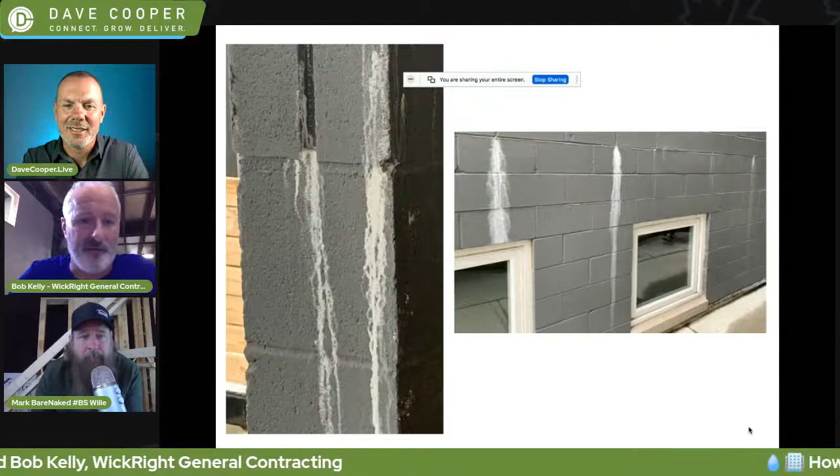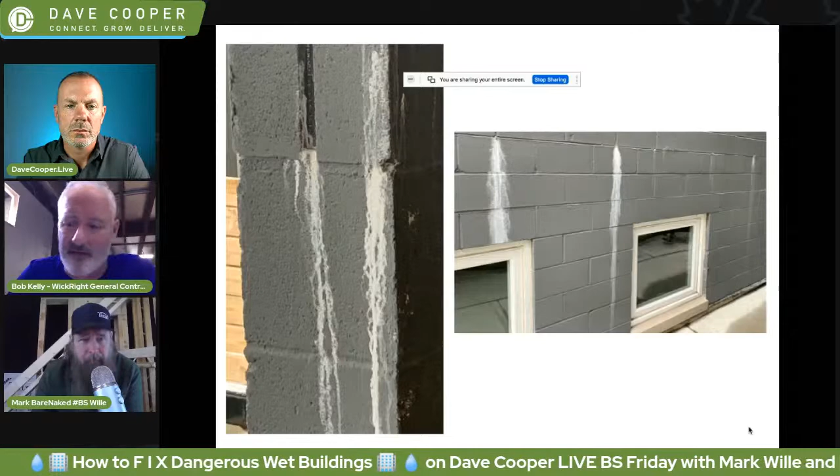Another client has water flowing through. In this particular case, they happen to have closed cell foam on the interior. We're not here to have opinions about materials - we're just talking about how the combination of materials has effects on these structures.

Here's a hospital where I was driving past - every parapet wall is soaking wet. Yet another split face block, 3-unit building.

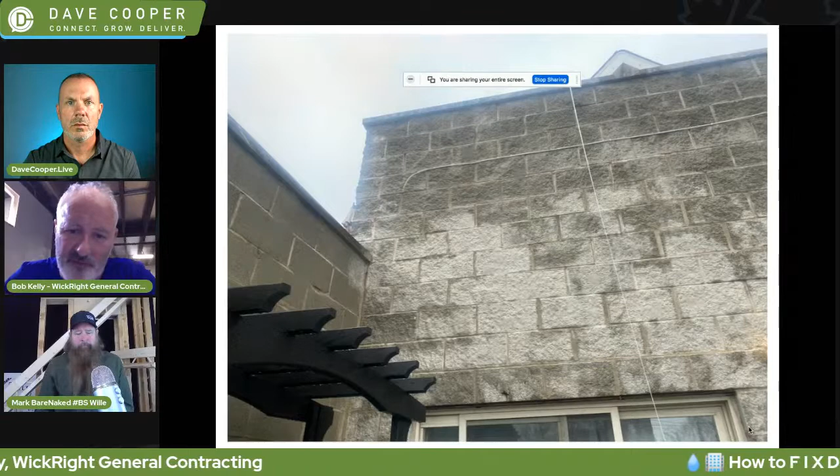Okay, so I'm glad you brought up the older foundation versus the newer material. To Mark's point, the efflorescence is because water is flowing through the structure, and as it dries, it's bringing materials out on the surface, oftentimes through the more porous of the two materials on the wall. What's interesting here is that there's no efflorescence on the mortar joints - only efflorescence on the block. That's an important point.

Portland cement is something everybody takes for granted as basic mortar. Thomas Edison enabled Portland cement to be mass produced back in the 1900s, and it became an additive to pure lime mortars to help them set up quicker. That's one reason harder substrates don't breathe. They take in moisture but don't let it out, whereas older lime mortars were the breathing mechanism. That's why you wouldn't see efflorescence on brick very often, except underground.

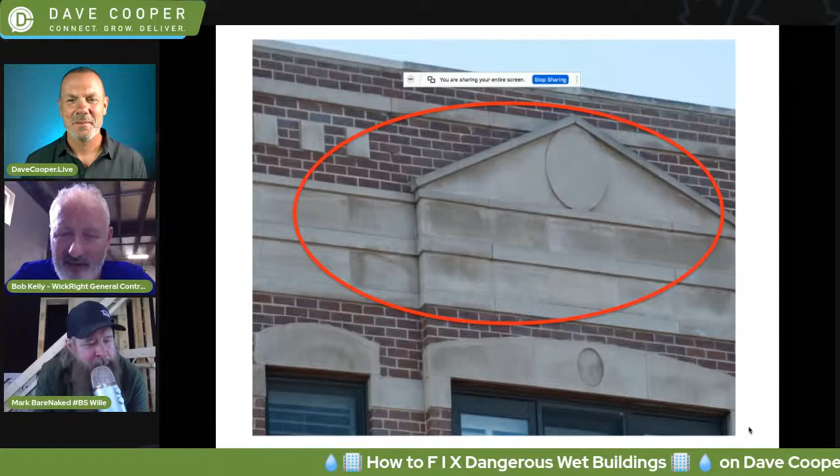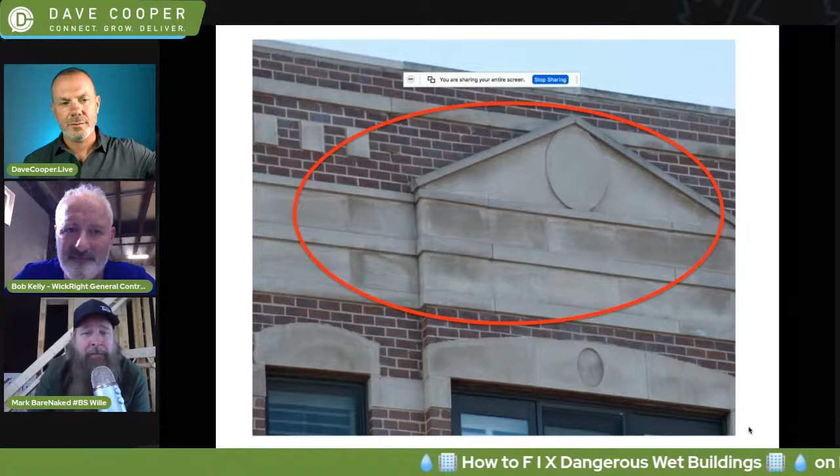All of that is important, because the beginning of this presentation is meant to be redundant with the mass amount of sites you're used to seeing as you drive, walk, and visit these communities, so you become aware that it's not supposed to be like that. These are signs telling us these issues have to be addressed, and we should realize how monumental this problem is.

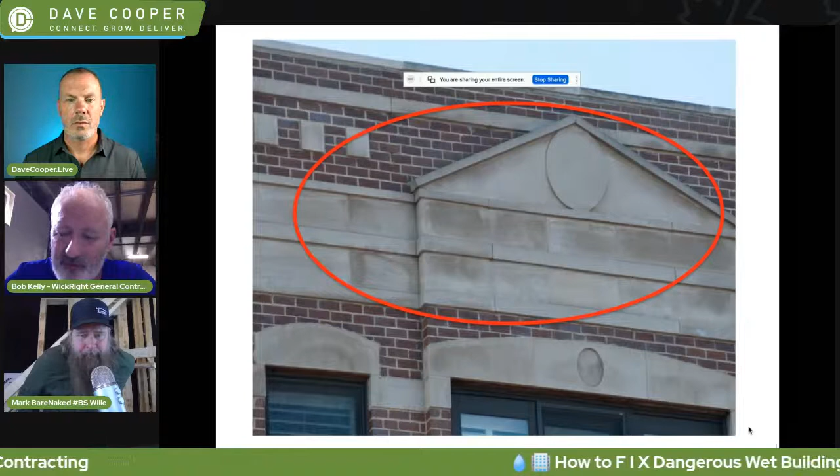The problem is it's an industry-wide issue, it's a cultural issue. Traditions are passed down from father to son, through the apprenticeship program, and when we teach the same things over and over without anyone questioning it, you get into a whole world of hurt.

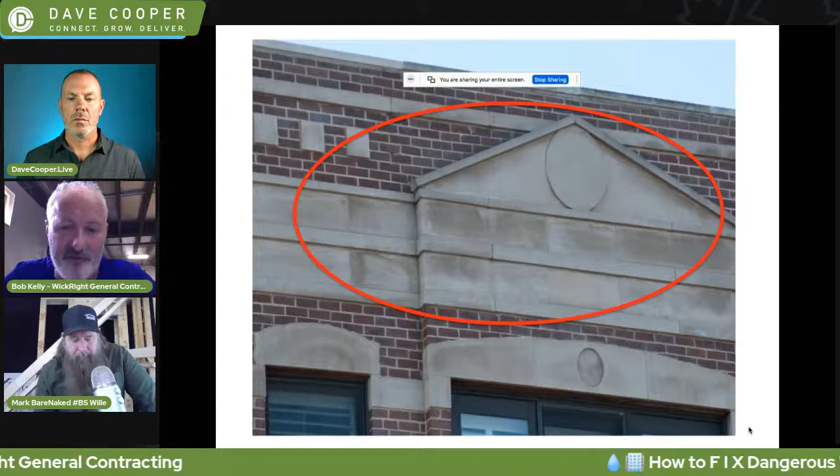Now basically every masonry structure ever constructed is porous, and the analysis is how do we get these things to dry out, and why didn't they show problems before? I'll continue on with this.

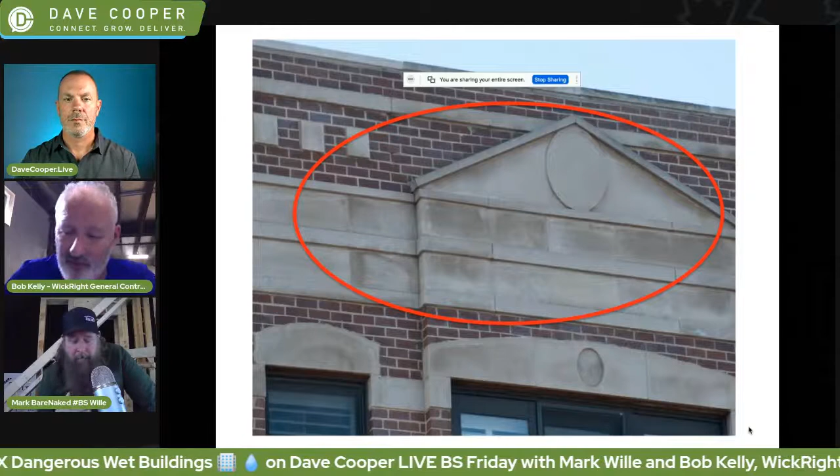So we have a little video to show you here. On one of my early projects, I looked down through a capstone and saw some water under, in the wall. I was able to measure down and identify where this was coming from. Let me start this video now.

But I've seen this more than once, it's not just here. Oh my gosh. Wow, all that was trapped in there. It was all trapped in there, right.

So the tradition of not using flashings is present in old structures, okay? So when you have a culture of people trained in old structures come over and work with harder, more contemporary materials, this is what happens.

So like the gravity of this, right? He knows there's something back there, but until that hole's there, this water never had a place to go, and it's pouring out like drinking fountains can't keep up with it. I wish I had that kind of pressure at some of the motorhome parks I've been staying in.

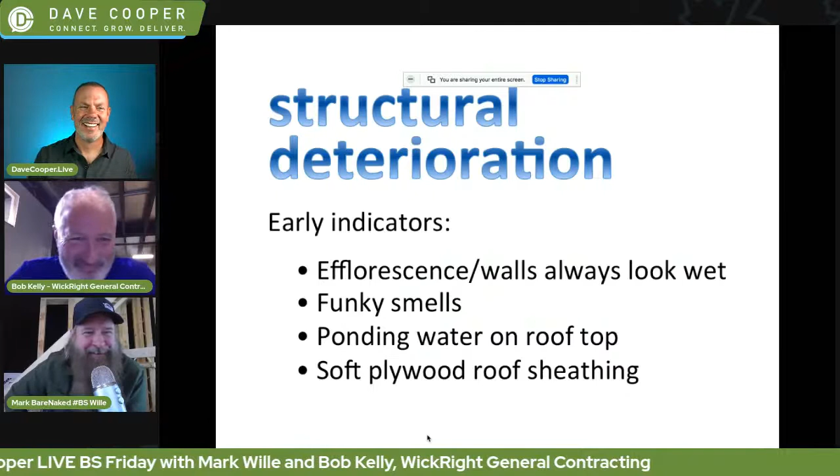Just drive by a masonry building and start drilling holes, if you can. Yeah, no problem, that's a 20-volt hammer drill. Thanks for that video.

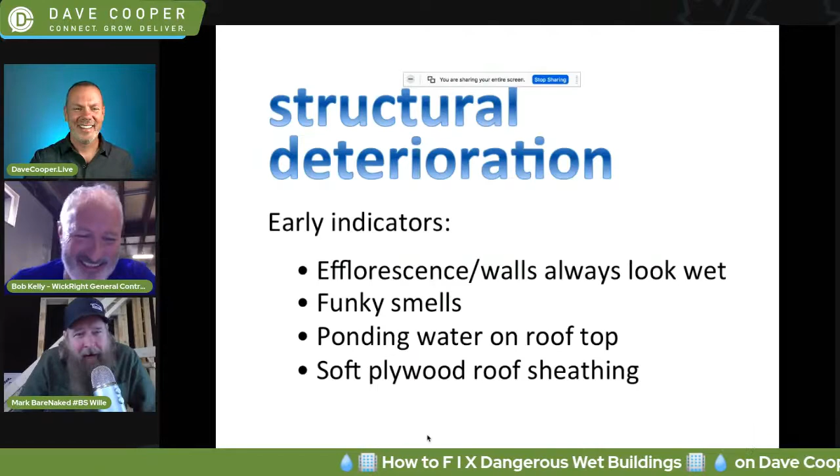I want everyone to be scared. That's not a mock, that's not created. There wasn't a random hose in the wall, right? That is water stuck in our wall.

Bob, how many times have you done that same thing where you drill a hole to let the water out? Every time I look at a wet wall, I almost need to keep a drill in my car just so I can help people out, go up and drill a hole through the mortar to let the water run out. That's what I'm feeling. It's interesting, people have asked me that question, but it's so random.

The hard mortars, okay, Portland cement is a hard mortar - Type O, N, S, M, you name it. The Portlands make things set up hard, whereas the softer mortars don't. So when I've seen other leaks like this, it's when we had to go cover a parapet because it was raining and water would just cascade into somebody's home.

And then when we fastened the tarps to the block, that's when we saw water weeping out. Got it. And that's probably happened a dozen times.

Interesting. And tell me, what does the tarp do? Can you explain that so people listening can understand? So when we're in an emergency repair, we cover the parapet wall so that the water stops flowing through the limestone and down into the walls. Got it, and that allows you to dry it out and repair it. That allows us to at least give them some temporary relief until we get a chance to get into a roofing project, and that's something I'm going to share with you in a little bit.

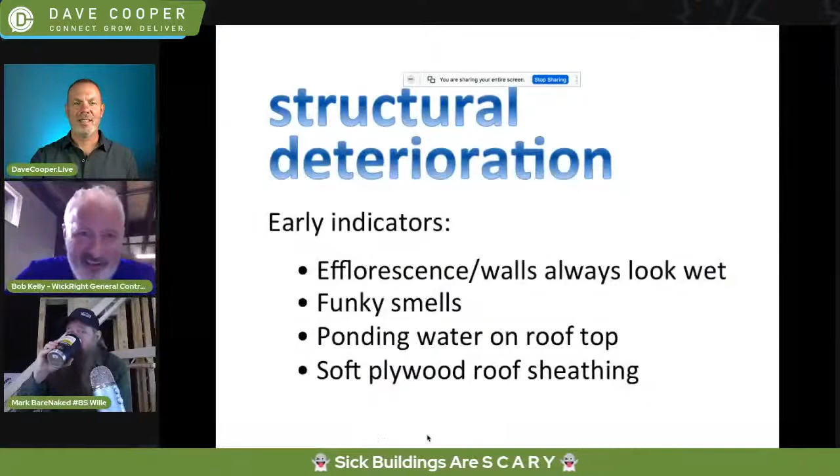So of course, all the water that we see in these structures is leading towards structural deterioration. So early indicators we find are efflorescence and then wet walls. Now, what's interesting about looking at a building, when you see cinder block and you see each layer seems to be wet a few inches, that's an indication that there's water at every mortar joint.

We get into other condominiums where the smells are pretty rough. It's very musty. Ponding water on rooftops can indicate that there's some rotten plywood or sagging, if trusses are starting to fail, of course, the soft plywood on the roof sheathing.

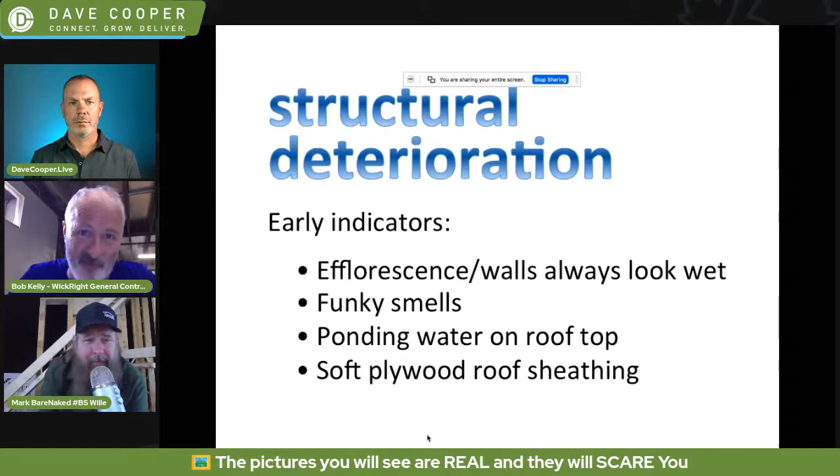The first thing I do when I get to a project is I walk the perimeter carefully. One time I was a little careless and it had a very low parapet and I didn't realize I was almost walking into a hole. There was no plywood at all. I almost fell off the building. So if anybody's doing these inspections, just be careful.

Holy crap. I told you, people, we were going to be scared. This is real. Yeah, it is real, but I have a question.

Let's understand that, because I think everybody's seen standing water on roofs. Well, what we're talking about is how the roof system is actually decaying in place and crushing under its own weight. So that's what we're looking at here, right? The ends of the trusses are rotting from the interior of the parapet wall, and at some point you will find that these trusses will shear off in place.

That word 'shear off in place' ought to scare people. Another telltale sign. So Dave, this is the review of the outside, and digging into it. I think there's a photograph coming up. Is when you're walking the interior and looking around the exterior wall, but all of a sudden there's a huge gap between your flooring and your baseboard.

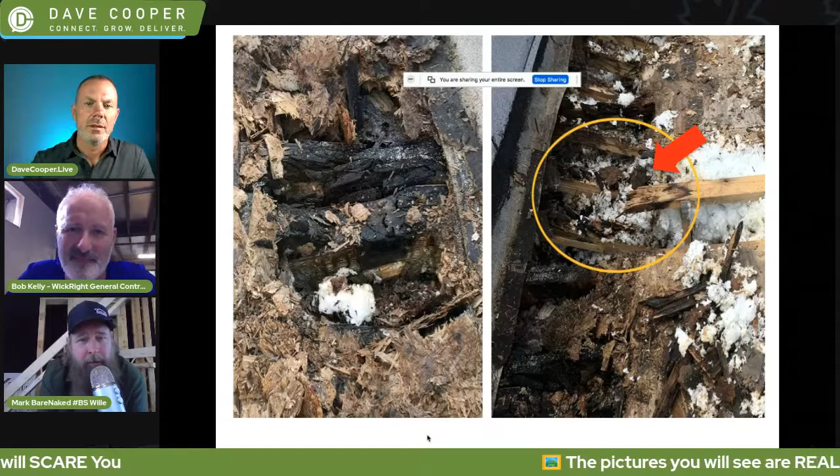Sometimes it just means you had a crappy carpenter, but sometimes it means that your floor is dropping. Wow, your floor. I don't have that picture here. I'm sorry, Mark, but that's okay. These are better. Yeah, when I saw that particular situation that you've mentioned, we were talking with the contractor, the homeowners, and my engineer, and I said we got to go. So I took the meeting outside.

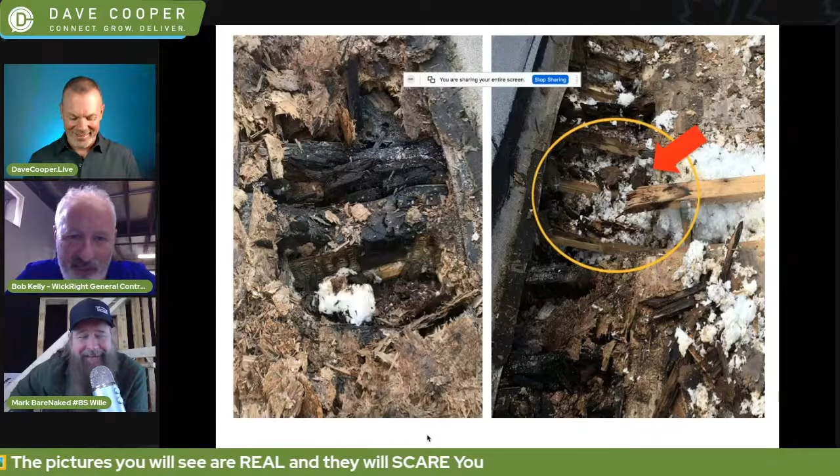So the next few pictures are going to be of typical top hanging and bottom bearing trusses. These are top hanging, see the Portland cement. See the code, this is what's crazy about this work. Code mandates grouting of trusses in place. In practice, I've never seen a truss that was covered on the ends, and all it would take is a Ziploc baggie to keep the water from going up through the end grain of the wood. And the Portland cement tends to corrode all the galvanized plates, so that's also something to take note of.

But a Ziploc baggie, or wrapping with an ice and water shield, right? Ice and water shield, creating the barrier. Zip tape, whatever, can create a barrier, right?

So this wasn't as bad, of course, but where the arrow is right there, that's where when we were cleaning things out, we were starting to clear out the grout on the sides of the trusses, which is something we do on every job.

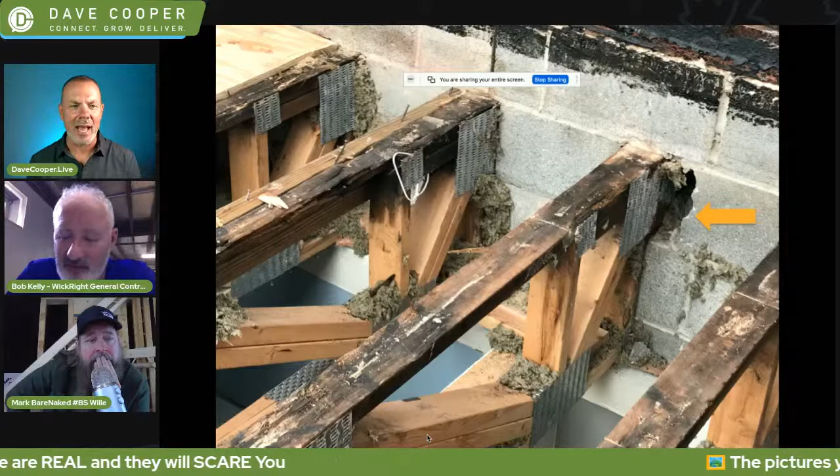That doesn't look like an old structure to me. That's definitely not built back in the early 1900s with the truss floor system there. Maybe you're going to get into this, so maybe I shouldn't ask, but when you have a new structure like this, is the general contractor at fault? Is the architect at fault? How does the liability work? These are not simple, inexpensive fixes, right?

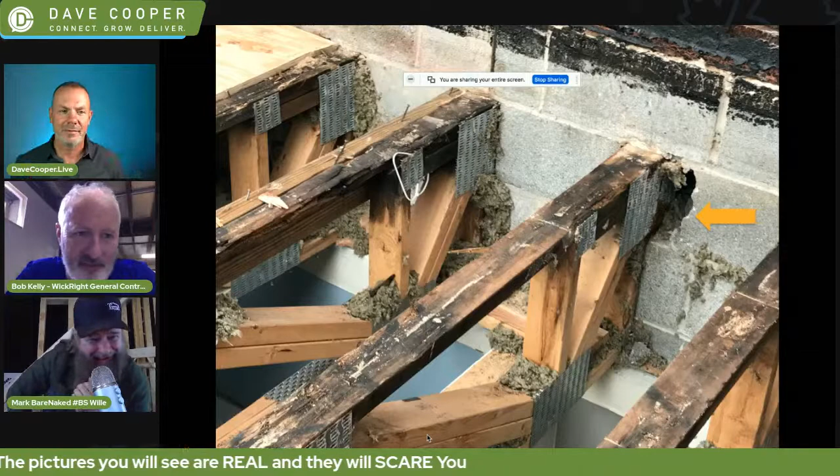That's a great question, and we're gonna pick up on that in a little bit as well. But almost nobody's responsible. All right, I'll let you get into it. Sorry, go ahead. Oh no, please. It's making me nervous. I'm like, oh my gosh.

So, Dave, you should be nervous because you pointed out, hey, this is an EWP, right? This is a new truss. I don't know, what is this building, 12 years old, Bob? I'm guessing. About 13. Okay, so pretty close. 13 years old, and you could see the black and rot in that SPF leg. You can see it, it's black.

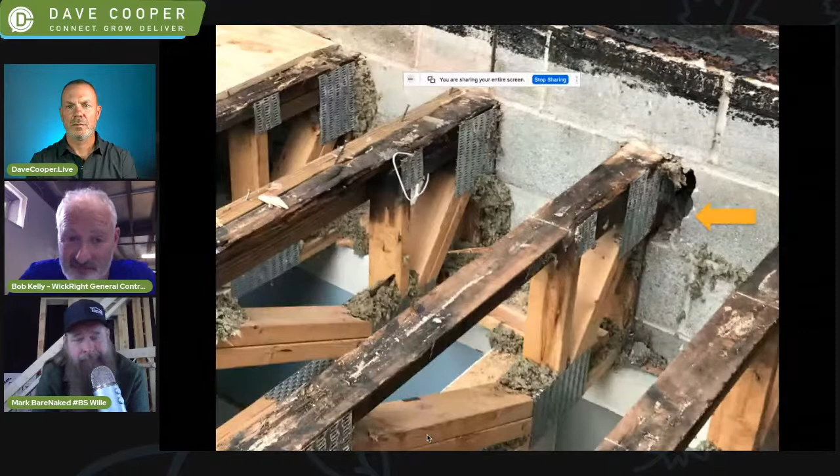Yeah, and this is after it dried out. Wow, let's see here. Okay. My pocket knife always tells the tale.

There's another. This is a parapet on an older building that was rebuilt about 20 years ago. But because they wrapped the roof over the top, they trapped all the moisture that was rising up through the common brick.

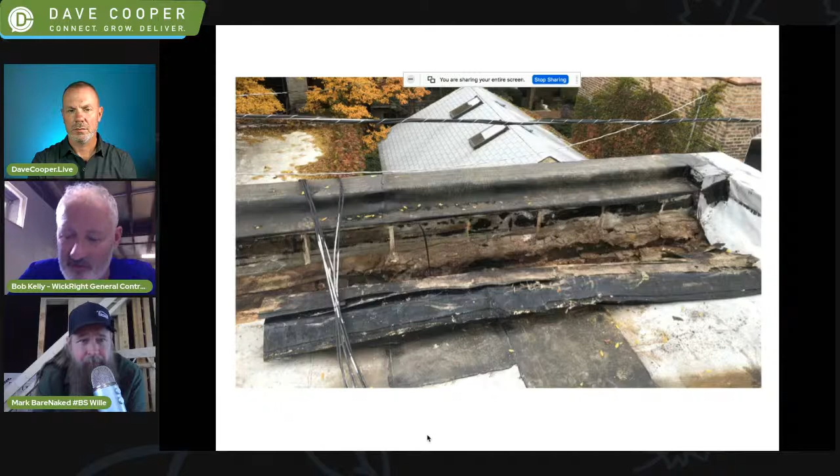So when you say rising up through the common brick, I don't think people understand that. Mark, you did a demonstration once where you stuck the wood in water and you could see how the water wicked up the wood. Are you telling me water wicks up brick the same way it wicks up wood? Oh, it's crazy, so yes. The wood is a carrier because of the capillary action.

You're totally right, Dave. But what you're going to see here is that moisture is just funneling its way up, right? Like literally, if it was ants at a picnic, it'd be a darn parade. Oh yeah. What's interesting is when water goes into masonry, the common thought is that water flows down and out.

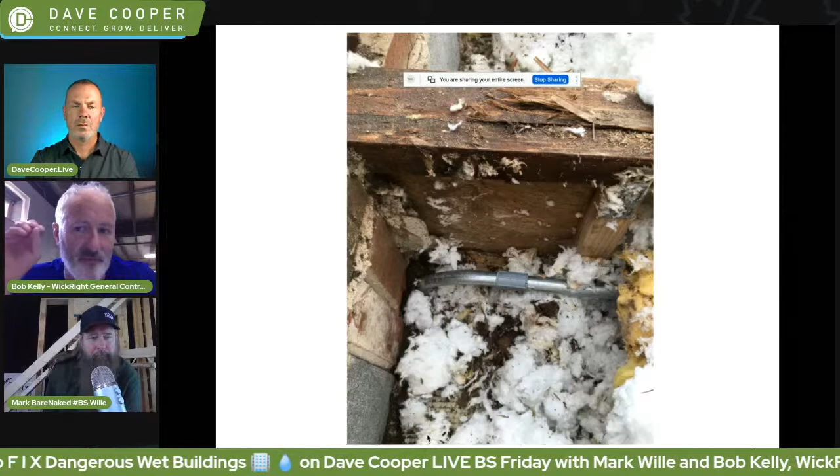That's when a building becomes fully saturated. But what's really happening initially, when water hits the side of any sort of masonry structure, it spreads three-dimensionally, so it defies gravity. The first building that I saw this with, there was a mold problem in a nursery.

They tore out the drywall. Then, as an experiment, I said, let's see what happens when we get water on this wall. Well, the water spot on the outside may have been 1.5 feet in diameter, whereas the water spot on the inside was probably about 3 feet higher and wider, as well as deeper.

And so it was that particular experience where I went around to all of the condos in that same building, and I drilled holes through the quarter round and tagged into the top chord of the trusses. At that point, my moisture readings were somewhere between 45 and 70%. It kind of blew my mind.

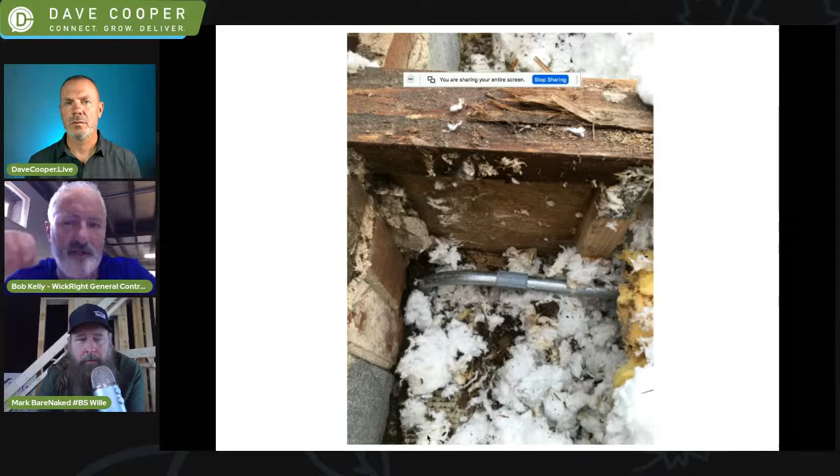How could a dry building with a coating on it be reading underwater basically? Well, that's it. I mean, listen, I burn wood in the winter sometimes, and once you get over 15%, it's heck to pay to even start the wood. So those numbers are astronomical. You're right, that's like being in a swimming pool.

Yeah, so here's another project, of course, just showing more rotten plywood. When you start getting into this work, it's one thing that's important to note: I had to unlearn everything that I've learned about how things are supposed to go together.

I had to realize that there wasn't just a bad building on the block, but when you look at systems, they're all the same. It doesn't matter if it's a $20 million house with brick and block or a $300,000 building with block. They all have the same components.

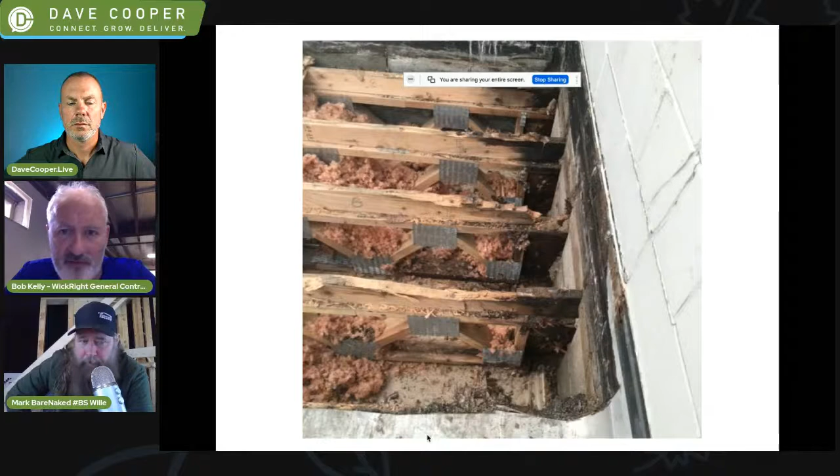So there's another example of rotten trusses. The dangers here, of course, the talk on the street right now is, when is the next platform collapse or pancaking going to happen? There's been a couple of pancaking situations that I heard about.

The first one was a gentleman went out for drinks one night. He came back, and his rooftop deck on a 14-year-old building was sitting on his pillow.

Another couple of collapses I've heard about in the past year were mostly bowstring truss structures where the common brick had given away. In fact, the other day, Mark, you know where this location is? It's on Dayton and Wisconsin, right in downtown Lincoln Park in Chicago.

I have my footprint all over there. Don't tell me the address, because I hope it wasn't a building I did. No, it wouldn't be. But it was a 1991 building. They just demoed it. So my heart just dropped. Thankfully, that wasn't my building, Dave. So we're okay.

Disclaimer: Mark and I have no relationship when it comes to any structures in Chicago. Yeah, I'm in New England, he's in Chicago. So let's just put that disclaimer in there now. Go ahead, Mark, you're all good.

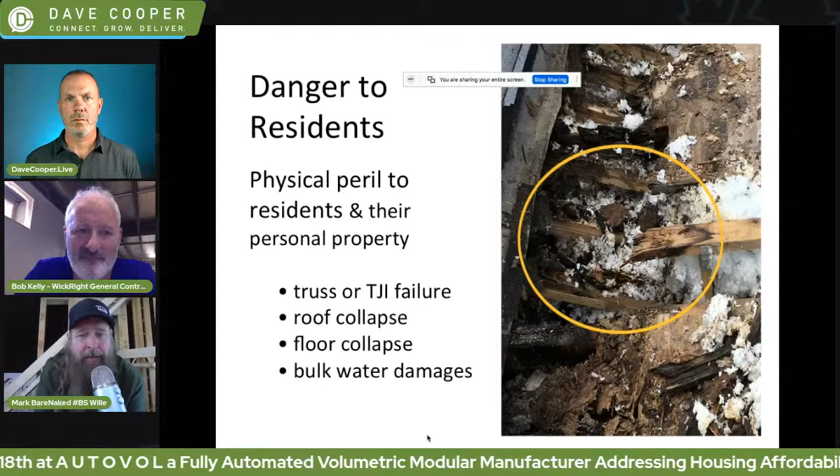The shocking part is it's a 1991 structure that now is completely demolished, because of health and safety. I don't know if this is a common thing in other cities, Dave, but there's been massive problems over the years in Chicago with porch failures. The ledger's not put on right, or not maintained right, depending. And there's finger pointing to the maintenance of the building, to the inspection of the porches, yada yada. At the end of the day, that's on the outside, where that ledger is allowed to breathe during many of the months. The problem is when you look at trusses and joists on the inside, that moisture is not letting them breathe. So it's actually scarier for the inside of the building than a deck.

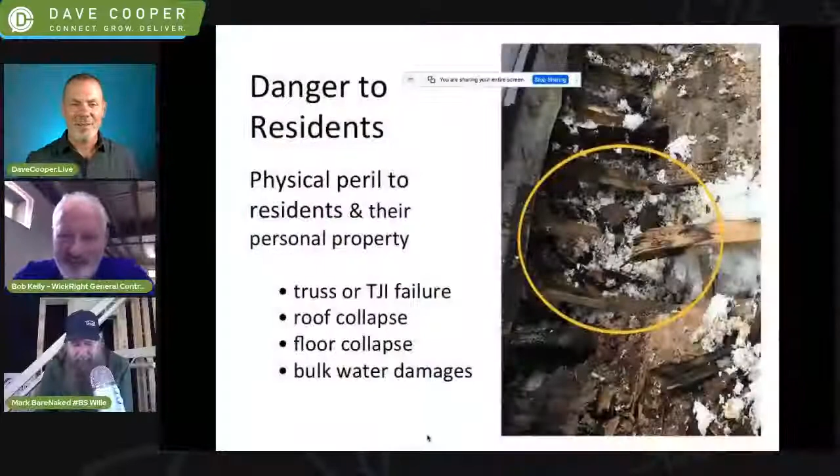Okay, so the last slide I had up, of course, dangers to residents, physical peril to residents and their personal property, just structural failure.

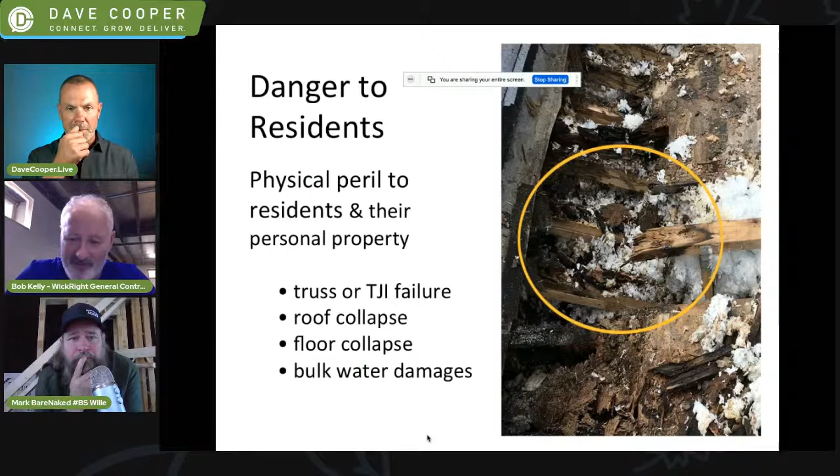The indoor air quality, as a father, it concerns me quite a bit when I walk in and smell a musty structure. There's a lot of moisture sitting in the walls, radiating into the structure, and of course asthma, allergies, respiratory illness—we're going to see these illnesses rise in segments of our population in these areas.

We've already done a map laying out high levels of this respiratory illness issue with where all the repairs have been done, and it's a pretty strong correlation on our own time frame. So now we have dangers to contractors. Bottom line, when you walk onto some of these buildings, you don't know what you're walking into, and you're often just crossing your fingers.

So, rotting plywood, trusses, TJIs. For those who don't know what TJIs are, it's a particle board—it looks like an I-joist. It's a great product when used in a wood frame, but many contractors use these sitting in masonry, and the particle board just has no tolerance for water.

It's terrible. I mean, for people not used to being in the trades and working on existing buildings, we do laugh about this stuff because you're overwhelmed by the amount of catastrophes you discover. But we certainly feel for the folks that have been enduring this and not sure why. That's why we're there—we love solving these problems.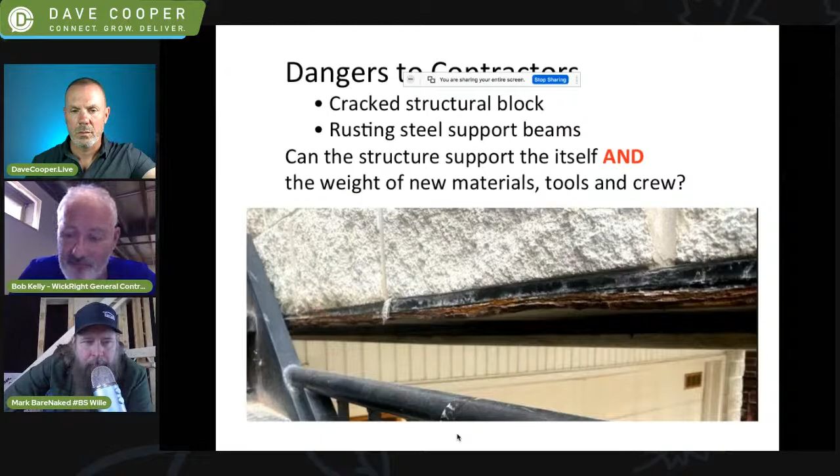That I-beam is about as curved as a wet noodle. In fact, I reached in and grabbed a chunk of the steel out and suggested to the condo association that it's time to open this thing up and see how to fix it.

So this is interesting—financial danger. There's a handful of things that are tough to negotiate when you see these issues. Insurance does not cover it. They call it faulty workmanship, but nobody knows they have this mold farm within their roof system or under their floors.

It's the contractor—you can't necessarily go into a job like this unless you're working on a time and material basis, because it often just starts to unfold and you don't know where the job's going to stop. In fact, to that point, we're on the tail end of a pool house repair where somebody put a lap pool basically inside a living room, and the entire roof system was so dilapidated. We pulled back all the materials and just didn't know when to stop. Now it's rebuilt.

Liability to clients, contractors—you really have to learn how to separate yourself from the project with your contracts.

Now, advising residents to vacate or not—that's a hard call to make. On the job where I saw the floor sinking, I told them to leave and get the place shored up as quickly as possible. In that particular house, they saw drywall coming loose from the ceiling. Well, it wasn't the drywall coming loose—it was the trusses shearing from the inside of the parapet walls.

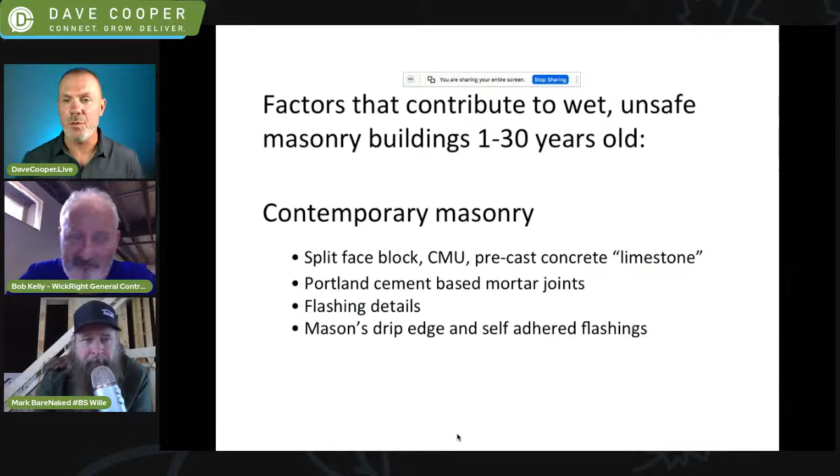Bronwyn Berry: How do we bake accountability into the construction of buildings, new and retrofit? This starts at design, continues into approval, and the review at the city level, and then at implementation with the contractor and inspectors. How do we have accountability into this chain of responsibility?